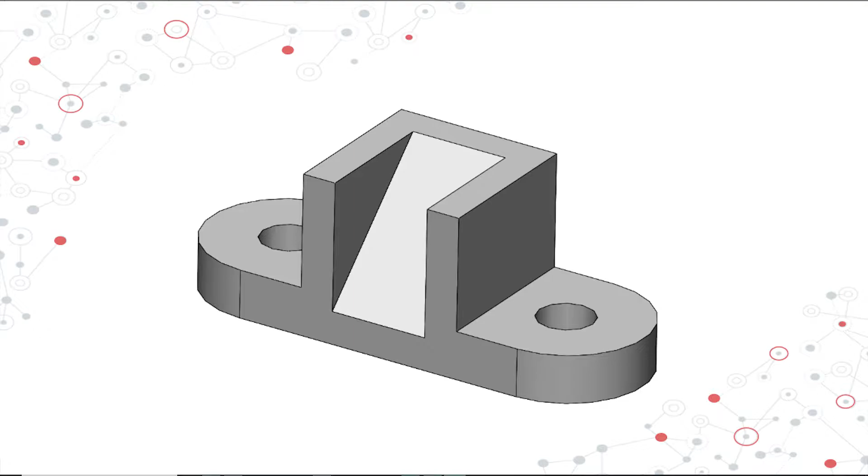For this part, we're going to be creating a CS bracket. You can see it right here. This is the part drawing for it, and you can see it's not terribly complicated. Start with a cut base, and then you've got an extrusion up here with a ramp almost cut in the middle.

So what we're going to do first is have your SolidWorks open, and to create a new part file, come up to this top bar, locate the icon that looks like a little sheet of paper. When you click on it, it brings up this window. Make sure that Part is selected, hit OK, and SolidWorks will generate a new part file for you. Go back to this blueprint.

The first thing we need to do is make this base here at the bottom, and you can see most of the dimensions for this base are laid out right here. This is our top view, so we're going to start by creating this general rectangle with rounded corners. It's not too bad.

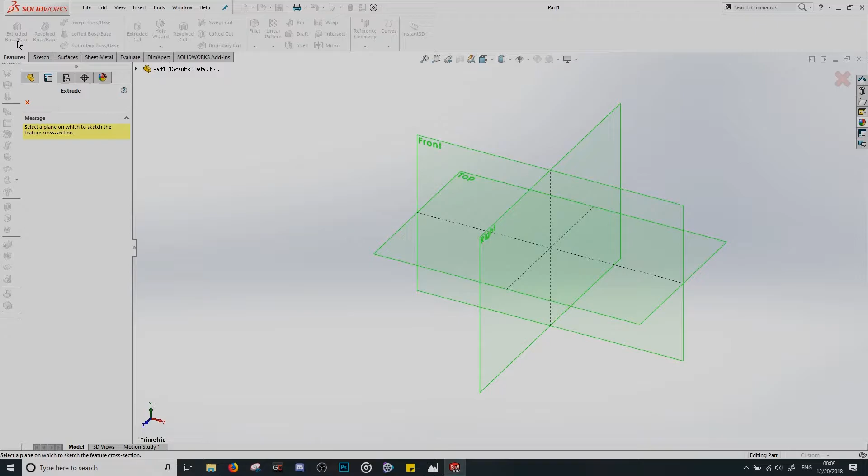Since we know we need to extrude something, we're going to go to our Features tab and hit Extruded Boss Base. It's going to ask what plane or surface we're going to extrude from, and for this part, I'd suggest using the top plane. You click on it, and now we are looking down onto the top plane. So anything we draw is going to be on this plane, and then when we turn it into a 3D shape, it's going to come from this plane.

Before we start drawing, I want to have a little reminder. One of the most important things to keep in mind when CADing is what units your part is in. I've made this mistake so many times - I'll get all the way through CADing a part and then realize I'm using metric units when it really should be imperial, or vice versa. For this part, it doesn't specifically say what unit system we're going to use, but I'm going to show you how to change the units anyway.

So you come down here to this bottom right corner, and you can click Custom. Right now we aren't really using a specific system - it's automatically putting us on millimeter, but I'm going to put us on MMGS, millimeter gram second. It really doesn't change much, but it's important to know how to change your units, and it's good to keep that in mind before you start CADing.

And I actually think that closed us out of our sketch, so let's go back to Extruded Boss Base, click on our top plane. Okay, and we're back.

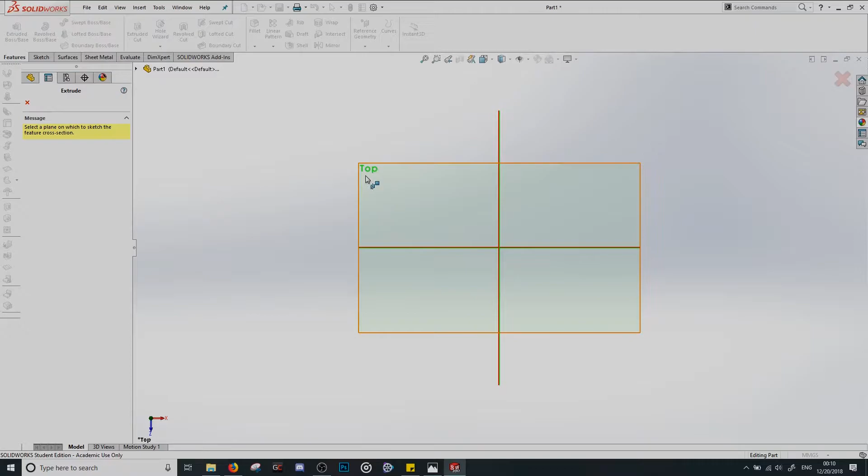As I mentioned earlier, this isn't a terribly complex shape. It's a rectangle with two rounded caps, as you could call them. The other word for this shape is a slot, and SolidWorks actually has a tool for that.

So if we go back, up here are all our drawing tools. You'll notice we're on the Sketch tab now - all of these things are specifically for drawing shapes that we're later going to extrude or manipulate. If you look down here, you've got line, rectangle, and then slot, with four different options, but for what we're going to do, I'd suggest using the center point straight slot.

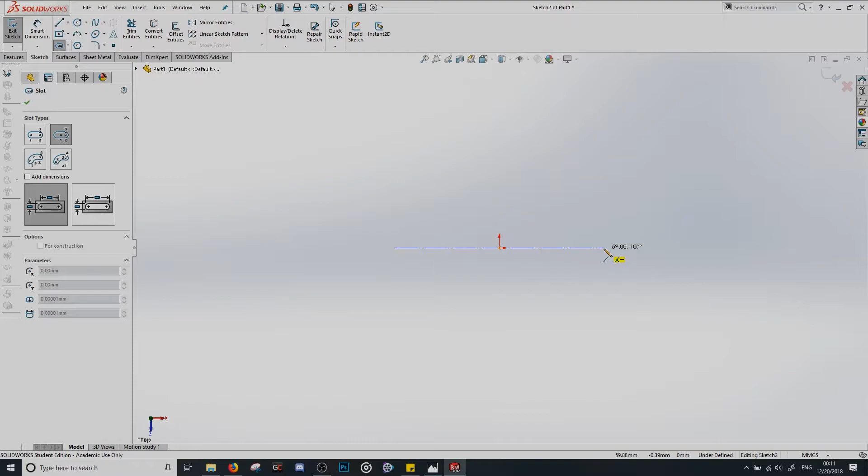The way you use this is you click it, and you'll notice it opens it up, and my cursor has changed too - I've got a pencil now. Because this is a center point slot, we're going to click where we want our center, so I'm going to click on the origin. You'll notice there's a little orange dot there. Click once, pull out, you can change the angle - I'm going to do horizontal. Then you click again, pull out, and click again. There you go, that's a slot.

So when SolidWorks has blue lines, you'll notice this entire border is blue. It means that this shape can be manipulated - it is not set in stone or anything. It's not defined.

You'll notice that this is a shaded color instead of just being a blank outline. That means SolidWorks recognizes this as a shape that it could extrude, which is good.

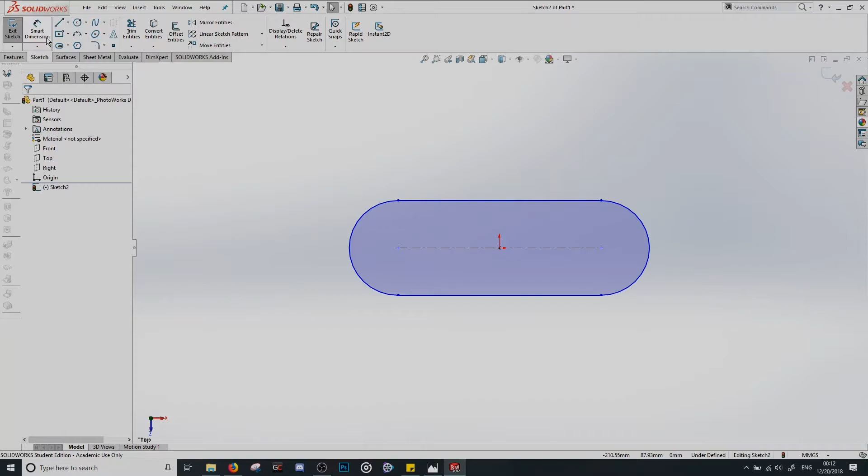Now that we have our shape, it's time to add some dimensions. Looking back on our blueprint, it says 114 millimeters between the two ends of our slot, and these arcs on either end have radii of 32 millimeters. So we go back and use our Smart Dimension tool up here in the corner. Click on it, click on this line, pull up, and say 114. Hit enter, and that part is now defined.

The last thing we need to do is define our caps. All you have to do is click on the line, and it said our radius is 32. And there you go, you'll notice now the lines are all black.

Black lines are good, they mean that your part is defined. You'll notice now when I try to drag it, I'm not changing the shape of that part, which is good. You want parts to be completely defined if at all possible so that they can't be manipulated, warped, or changed unless you go in and change the dimensions. It ensures that if you try to put these parts in an assembly, they won't get all messed up and changed without you needing them to.

Everything will fit right. So if we go back to our drawing, we notice there's these two holes cut out, and you can see them right here. They're centered on the ends of that slot line that cuts through the middle of it, and it says their diameter is 22.

So you'll notice over here it says R32. The R stands for radius, so that's going to be half of your diameter. This circle with a line through it, that is diameter. You'll notice the dimension too has a line going all the way through it. For full circles, you're more likely to see dimensions in diameter. When it's an arc, you're almost always going to see it with radius.

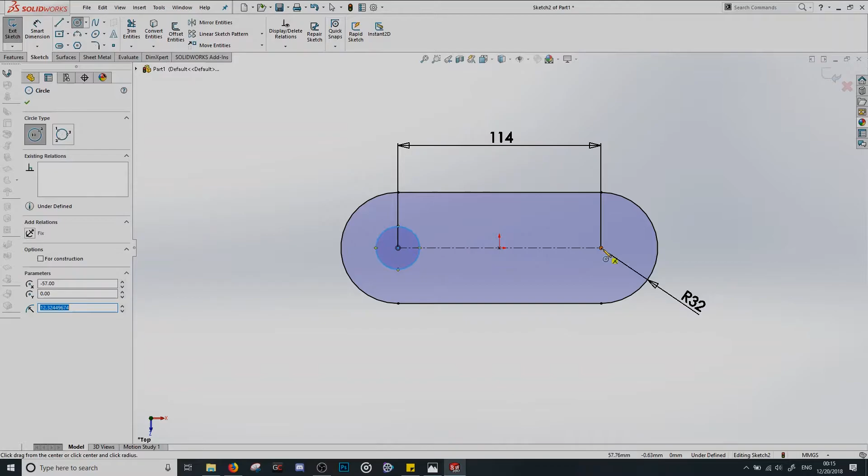So we need two circles with diameters of 22. We go back to our part, and there's a circle tool up here next to our line tool, and circles are really cool. There's only two ways you can really draw them in SolidWorks, but we're going to go with this center point circle, it's the easiest one. You're probably going to use it the most. I'll pick my center right here on this end, click once, drag, click again. Then I'll do the same thing over here, click once, drag, click again. I hit escape and I'm out of that tool.

Now I can go back to my Smart Dimension, click on the border, and say that I want my diameter to be 22 millimeters. You'll notice it doesn't specify units, but like I said, we changed our units in the beginning, so everything in here is in millimeters.

Now, I could add another dimension onto the circle here on the right, but it's good to get yourself into the habit of minimizing how many dimensions you need in your parts. The more complex your parts get, the more dimensions you're going to need to fully define everything. But the more dimensions you add, the more cluttered it gets. After a certain point, it becomes really difficult to weed out what the actual part looks like behind all the dimensions. So it's a good thing to keep in mind to try adding relations between different parts of your sketches. I'll demonstrate that.

In order to add a relation between two things, you first need to have them selected so SolidWorks can recognize what's going to happen, or what two parts of your sketch the relation is going to be between. You come up and click on the first part, so I'm going to click on this one circle. You'll notice it's highlighted. Then hold your Shift key and click on the next part. Now you'll notice we have two highlighted circles, and over here on the left we've opened a Properties tab. I want these two to have equal diameters, so I'll go down and hit equal.

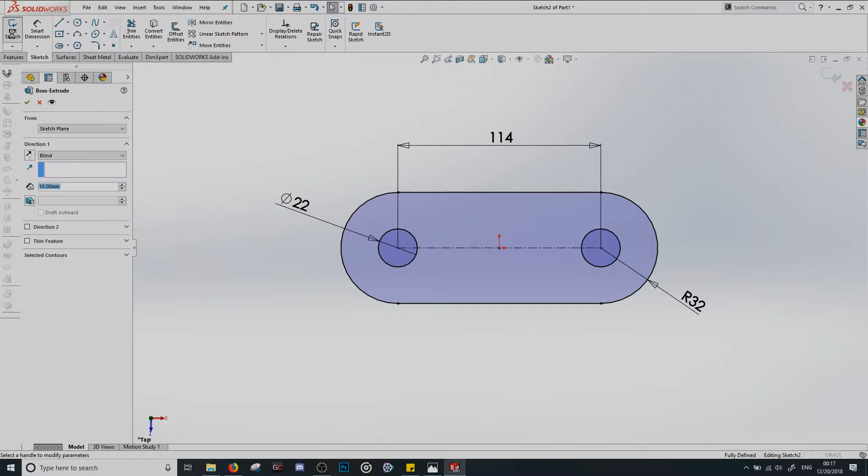So we're going to go back to our part, exit from the sketch here in the very top left, and now it's going to let us extrude. This yellow highlighted part is kind of SolidWorks' way of letting you visualize what's going to happen, and it'll change as you mess with the settings.

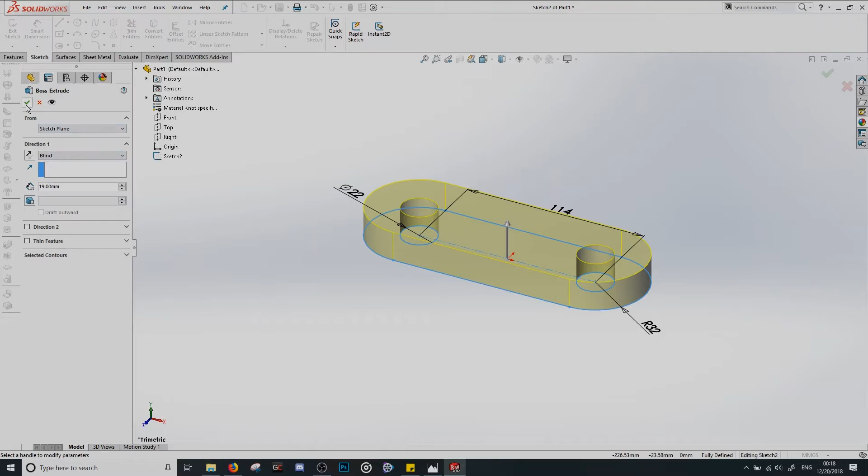So for direction, we want to keep it. We're just going to say it's going to blindly go up. We don't really need to change anything about that. This D1 is your depth, and so we're going to change that to 19 millimeters. You'll notice the highlight changes with it, and that's really all we need to do. So we're going to come back and hit this little green check, and boom, there you go.

So if you want to look around and change your viewpoint, you can hold down your mouse wheel and drag, kind of get a better view at this. So this is our top plane again. I can show you that. So yeah, this part is sitting on the top plane. But we still have more to add. So let's go back to our blueprint, our drawing. I keep calling it a blueprint.

So now we have this big extrusion on top of our base. I'm going to go back to our drawing. We're going to extrude something from this. So we're going to go back to extruded boss base, click it again. This time we have a part, so it's going to ask us to select either a plane or a planar face. So we're going to come up and click the very top of this part.

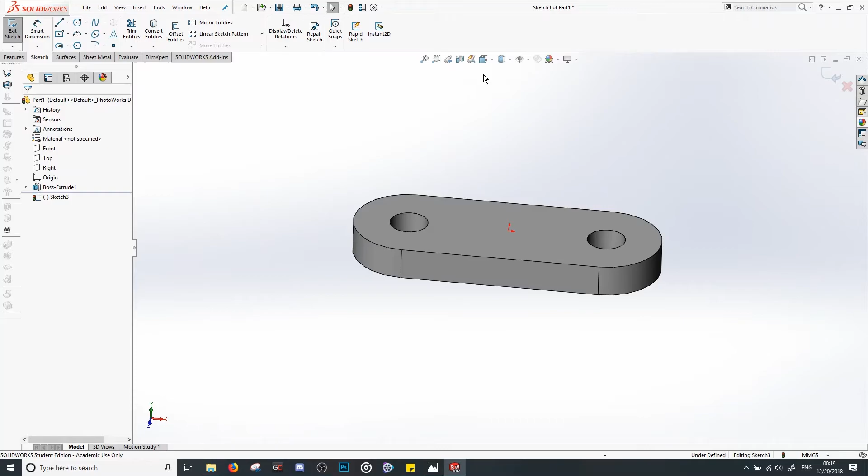And the cool thing is, up here you can see a cube with arrows in it. This is going to let you change the way that you look at the part, and I want to look at this part from the top. So you click it and you locate this one up here, top, and boom, it'll automatically have you perfectly aligned. This comes really in handy if you're working with very geometric parts.

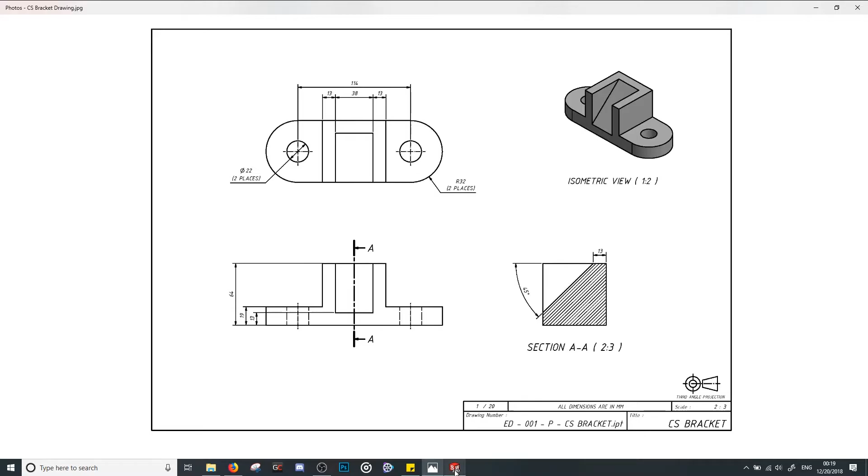So what I'm seeing here is that we can basically make a rectangle and extrude it upwards, kind of like we did the base, on top of what we already have. I know that it hits both of these edges. It's going to be flush on both edges. So what I can do is make a simple rectangle. And because it's centered on this origin right here, you can actually use the center rectangle tool.

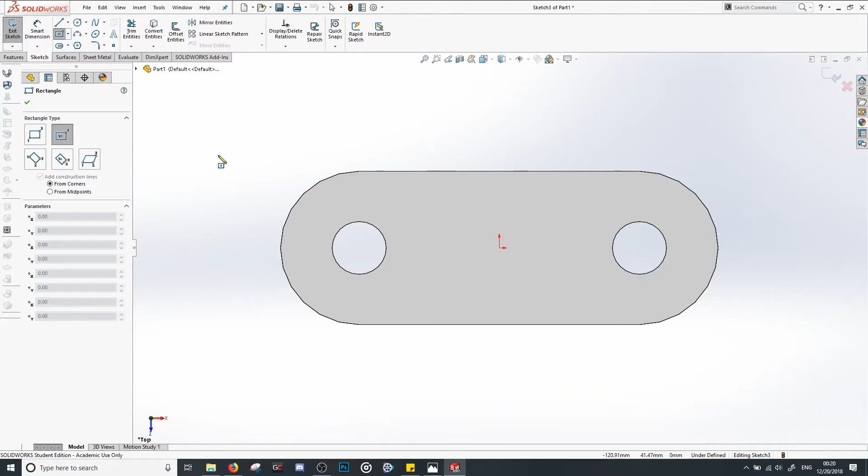So you have line, then you have all your rectangles. You click on center rectangle. It's really similar to circles and slots. You're going to click where you want the center, and then you drag out and have all of your sides come with it.

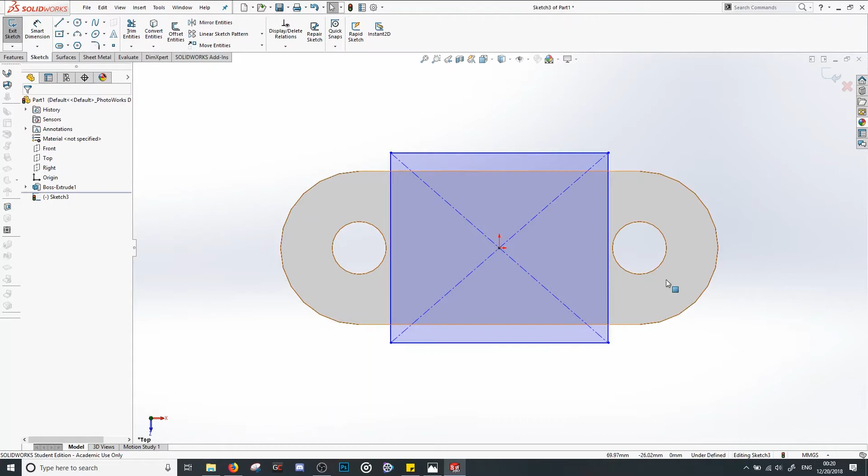This is going to be another test in relations because I know that these top and bottom lines need to be flush with the top and bottom lines on our base. And there's actually a really nice way we can do this without having to add an extra dimension, because like I said, you don't want to clutter up your parts. So what you can do is click on this line, hold shift, and then click on this top line.

And now you can come over to your properties, add a relation, and say that they are collinear. If you remember from geometry, collinear is when two lines occupy the same space in whatever planes that they can. Oops, I'm not done yet. Okay. So you'll notice that these lines up on top and bottom are black. That's what we want, but these lines still move, and that's a problem.

You don't want that. So if we go to our drawing, it says that the width of this block that we're going to extrude is 13 plus 38 plus 13. So it means that each of these little sides up here are 13 units, and then this big gap is 38 units across.

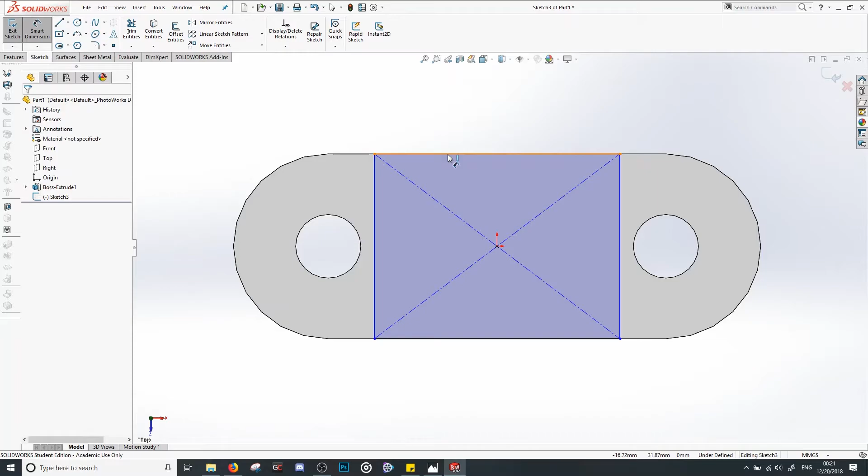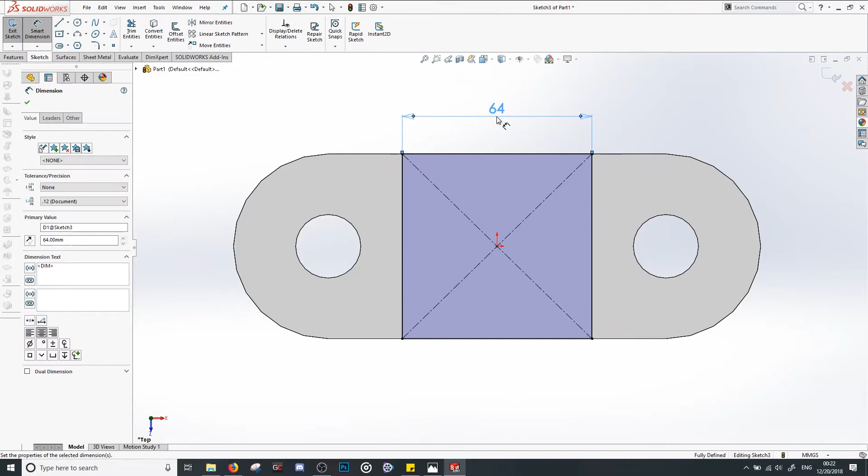So go back to our smart dimension, and if you're a math whiz and you automatically know what 13 plus 13 plus 38 is, good for you. If you want to take a shortcut, good news, SolidWorks is actually set up for that. You can type 13 plus 38 plus 13, and SolidWorks will automatically give you the dimension that you're looking for. So that comes in really handy.

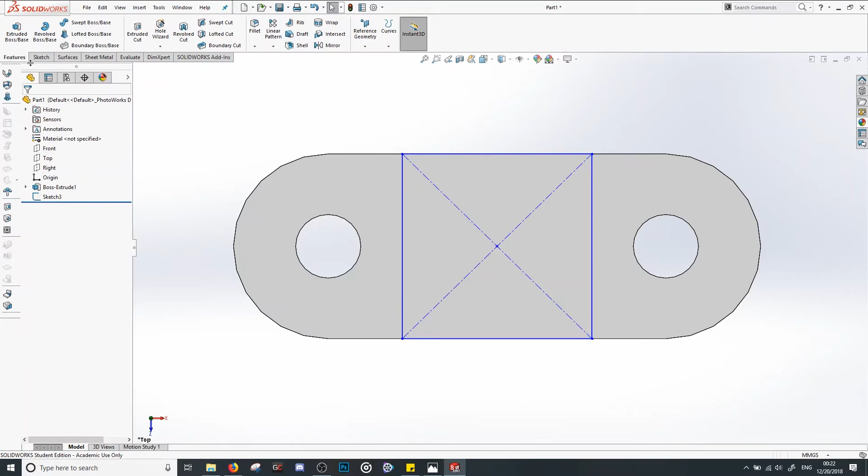And now we're going to extrude this just like we did our other part. So the height of this is actually going to be 64 minus 19, because you'll notice this is the height we want. So we go back, we exit our sketch. I accidentally told it not to extrude, so I'm going to click it again. Come over here to my parts tree, select my sketch. There we go. That's what I want.

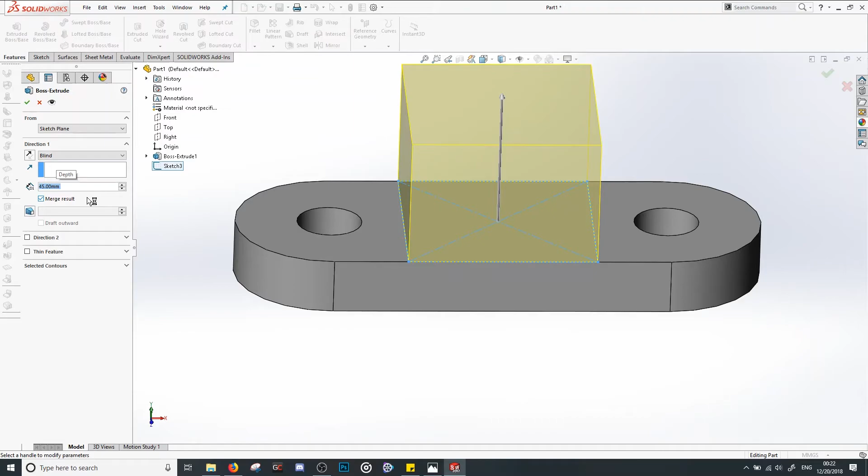So what did I say, 64 minus 19? Yeah, okay. So you come over here, you change your dimension, 64 minus 19, 45. There you go. Once you got that, you hit OK, and boom, you'll notice it's looking even more like the part. So the last thing we need to do is cut this little ramp triangle thing out of the very center of this part. There's actually a really neat way you can do this that comes in handy quite a lot.

Now, the drawing for this part actually gives you a hint as to what we're going to do. You'll notice that there's this line AA that cuts this part in half evenly when you're looking at it from the front. And then you'll notice over here it says section AA. So what this is saying is that you've got the front plane that cuts this part in half, the right plane that cuts this part in front, and then on that plane, this is what your part looks like.

So the shaded part is solid. This will be the back of this part, and then you've got the base, and then up here is that cut, that triangle cut. And so that's actually really helpful for us because it lets us know what type of cut we need. So if you go back to our part, up here on your Features tab, you've got all of your extrusions and sweeps and bases.

All of these things are when you're going to, let's say, create matter. So when we extruded this base and we extruded this top part, we created something in SolidWorks. Divided by this line, however, are all of your extruded cuts and swept cuts and lofted cuts and boundary, all those. Whenever you have these, you're taking away matter. You're decreasing mass or volume. So we're going to choose extruded cut.

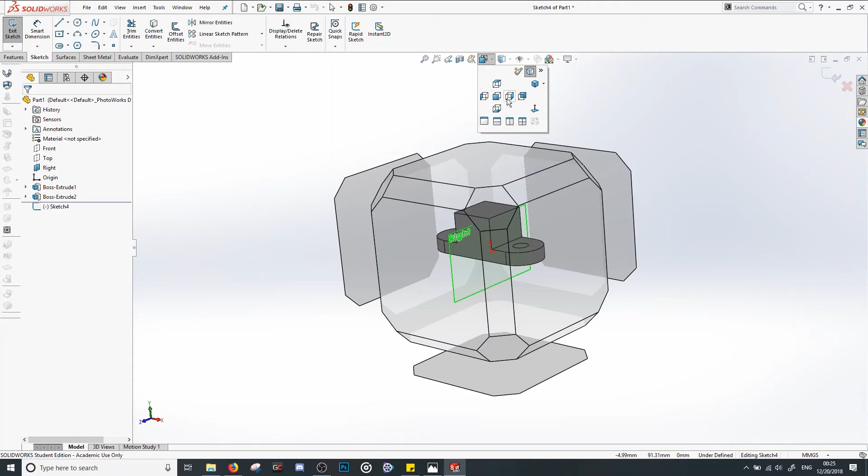And for this, instead of picking a top plane or one of these planes, we're actually going to pick our right plane. And I'll let you see why. So you'll notice the right plane cuts this part in half, just like that section AA did in the drawing. And so this is going to be really handy for us. Actually, I'll keep that up. Okay. Change the view again. We're going to look at it from the side. And now we just need to draw that triangle.

So we know it goes from here, kind of goes to here. It doesn't have to be exact. We're going to dimension it later. So there you go. That's our triangle. And up here it says that the tip of the triangle in the top right is 13 millimeters away from the vertical plane of that extrusion.

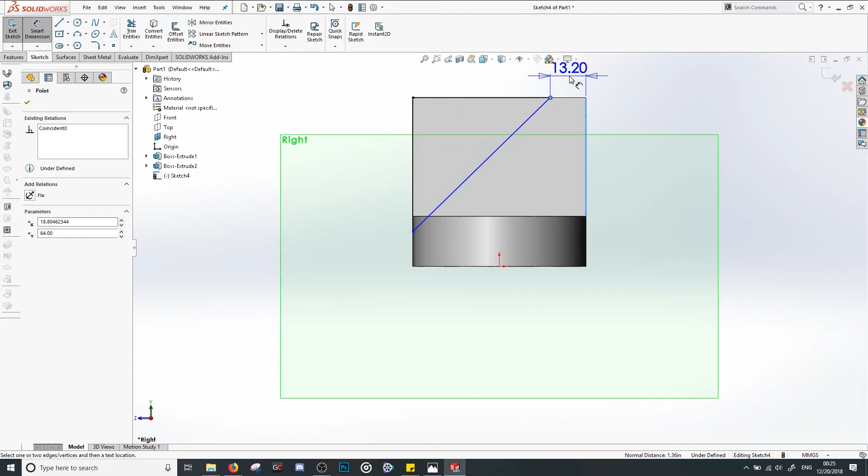So come up to our smart dimension, click this tip of the triangle, click this line. I missed it. Click this line. And wow, I was close. Okay. Change that dimension to 13. There you go. So you'll notice we already have a line that is already set. So now our last dimension is that the angle between the top of the part and this hypotenuse line is 45 degrees.

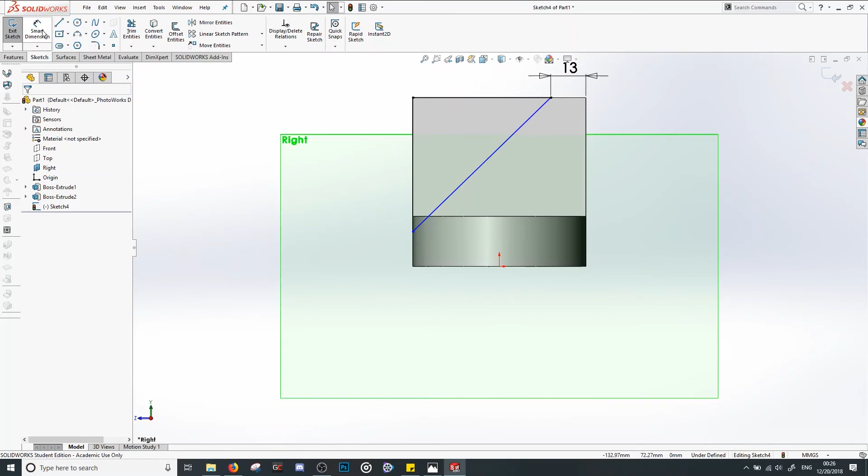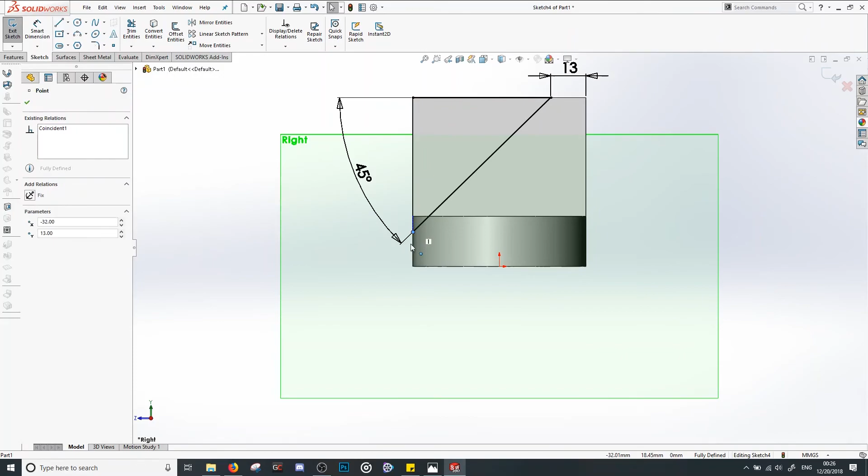So we're going to come up to Smart Dimension and click on this top line, click on this hypotenuse, and there you go. You'll notice now we can add an angular dimension. Just close again, 45 units, hit enter, and boom. Black lines is good. That means that everything's defined. I can't drag it or mess with it or do anything, and that's awesome. So now we're going to exit, and this is our extrusion.

So our last two extrusions had us just going in a blind direction. We didn't really care about anything around us because we didn't need to. The part wasn't that complex. However, now we need to change the direction that this cut is going because we want some of the cut on the left of this plane and some of the cut on the right. And so what you do is over here on this cut extrude panel, you'll notice it has direction 1.

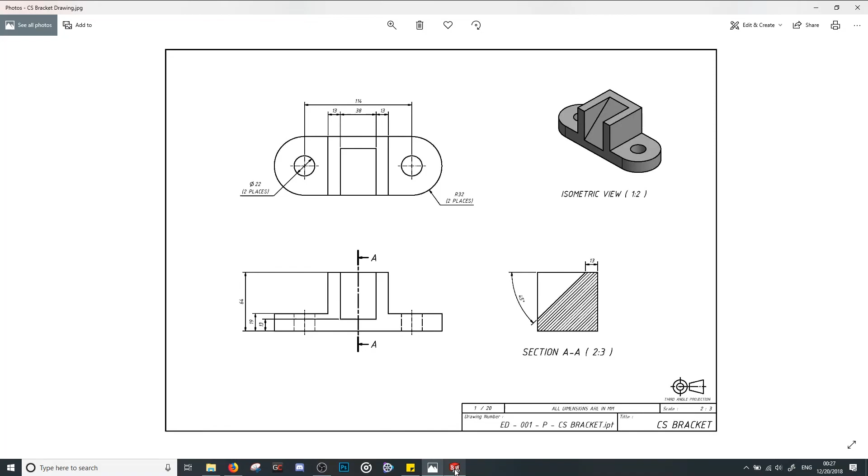So we're going to change it from blind, which is what we've had it at, to mid-plane. So now you'll notice we've got equal distance on both of these sides, and the center part is cutting equally on either side of the right plane. So if we go back to our drawing, from this top view, you can tell that that center part is 38 millimeters across. I'm going to come back to our part. I'm going to change that dimension to 38. You'll notice it changed up here. Hit check.

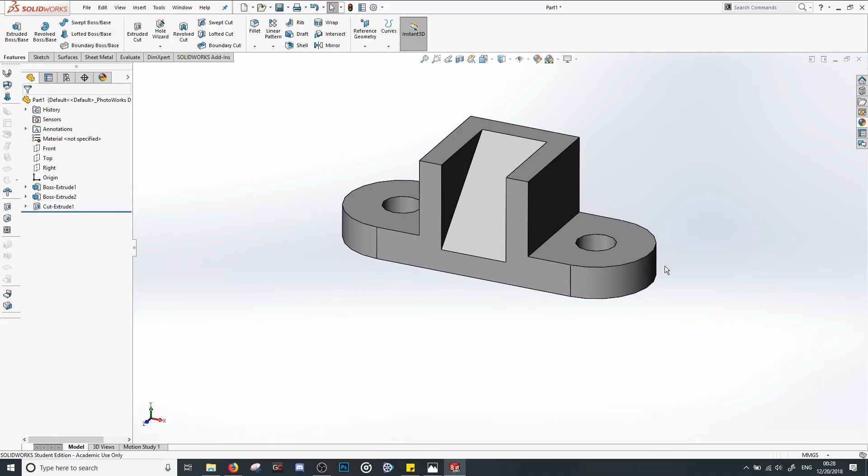And there you go. That's how you make a CS bracket in SolidWorks. If you want to save your part, you can come up here, hit this save button, and bada bing, bada boom. There you go. You have created a new part in SolidWorks.